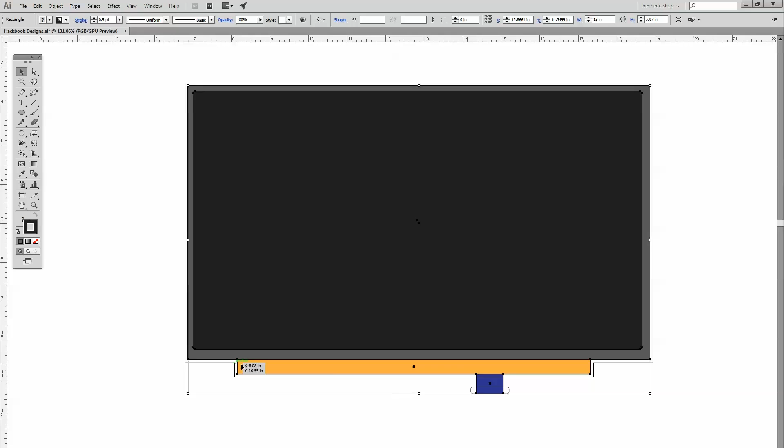Okay, next I'm going to draw in the LCD and get its panel cut. It's pretty simple, so I can do this all at once without creating the rest of the unit. So we have the LCD glass here, and then there's the driver portion that sticks out the bottom. It probably sticks out the bottom so it doesn't have to be on the back, which makes the entire LCD thinner, but it makes it wider.

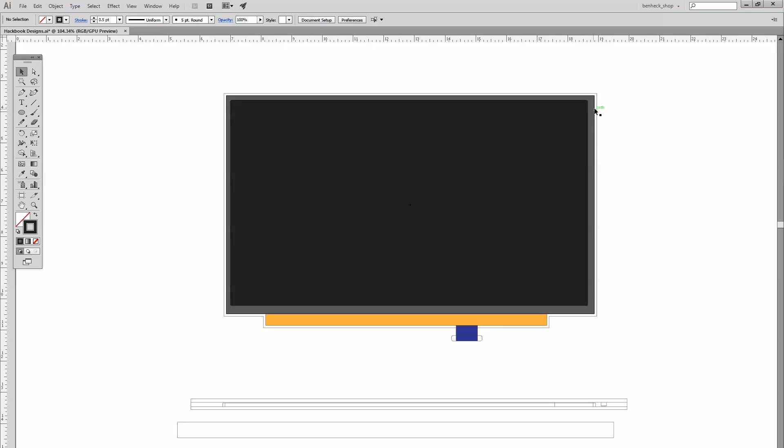We also have to draw in where the data cable is right here, and we want to give it a wide berth so it doesn't bend itself too much, because it's a thin connection, it's fragile, we don't want it to break. So once we know the size of the LCD, we can do a 0.075 offset from it right here, and that is what we'll use the funky foam for.

And so apparently I'm addicted to funky foam. It's really great for things like this, and this is what I actually use it for the most. Funky foam is this adhesive-backed foam, and it's very consistent. It's 0.075 inches thick, always, which means you can count on it.

So if we were to make a concavity in a stiff material for this LCD and have very little tolerance or no tolerance, you could probably cram the LCD in there, but it's a thin piece of glass, and the edges are the most susceptible to damage, so you don't want to do that. But with funky foam, you can say, okay, here's the size of our LCD. We come the distance of the funky foam, then we design the rest of the shape around that.

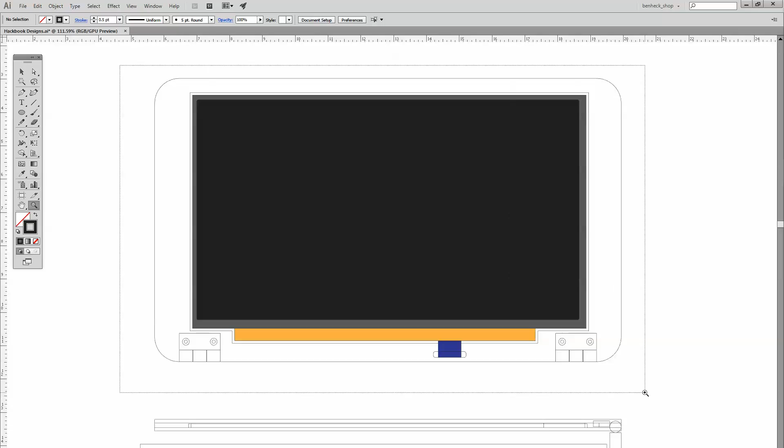And the thing that's great about funky foam is it's foam, but it has some compression to it. So if your measurements aren't quite exactly right, you can still press the LCD between the funky foam safely and also have it fit firmly. So in a way, the funky foam almost acts like a spring, keeping it all centered.

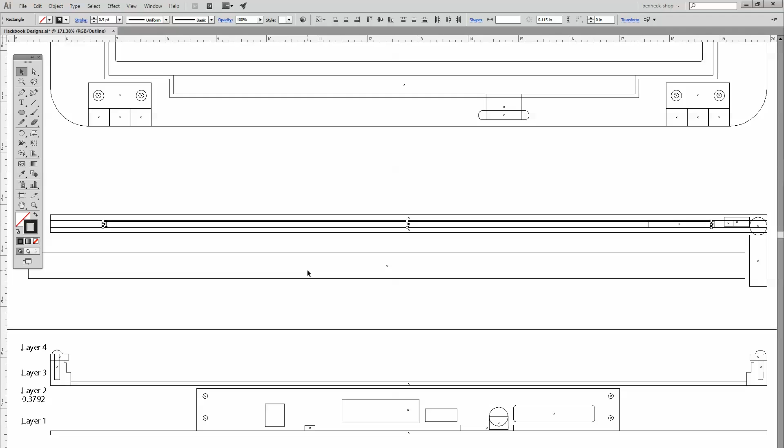So the LCD itself was very thin. Let's see, how thin was it? Less than 1/8 of an inch. So kind of like a car's windshield, the LCD being glass actually has a decent amount of strength, but since we're not putting aluminum around it like a MacBook, we need to actually shore it up a little bit.

So what I'm going to do for this is have a front portion, which will be 6 millimeters thick. We'll cut that out of Sintra and create a concavity in it for the screen. Then we'll cap it off with a piece of 1/8 inch thick black acrylic, which will give it more rigidity. We'll bolt them together, and then we can actually use the black acrylic to our advantage. We can laser cut it and have a backlit logo on the Novena laptop itself.

Because usually with these LCDs, it didn't used to be like this, but now it is. There used to be a metal backing on the back of them, which would help reflect the light, but apparently the light refraction is better now, so some of the light spills out the back, and that's actually how they light up the logos on the back of laptops, because that light's already there.

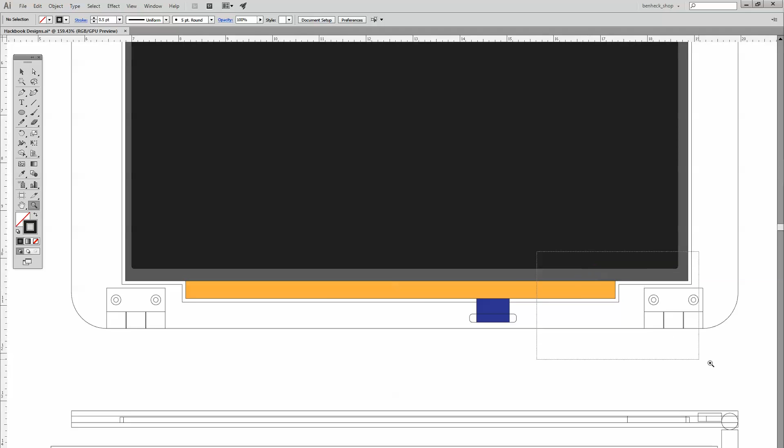So before I can actually route the LCD portion, I need to make the hinges. I'm going to have to do these custom because, as I said, this material is pretty thin. So half of the hinge will connect to the top of the unit, which is not that thick, and then the other half will connect to the base of the Novena.

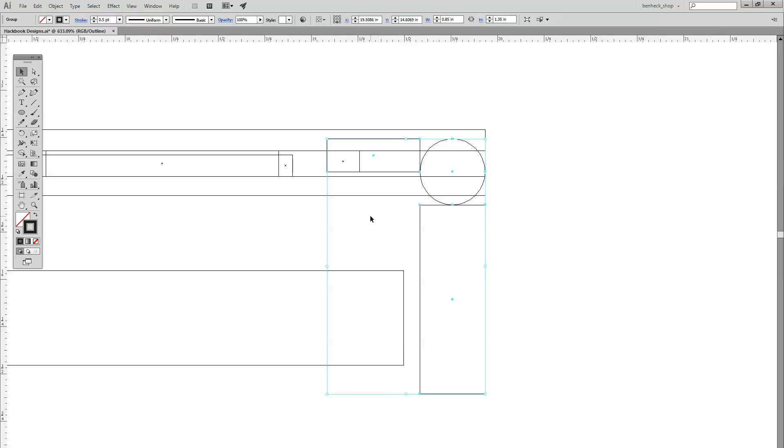So I kind of drew the hinge here. Even though this is the front view, I drew the hinge on the side just so I could see the thicknesses. So this larger rectangle represents what will fit into the base. The circle is the pivot point, and this rectangle at the top is actually what will slot into the LCD side.

So I'm going to go to Fusion 360 here. Here's that same thing drawn as a sketch in Fusion 360. And what I'll do is I'll extrude this out into 2 pieces. So I want to make sure I extrude them separately as separate bodies. And that will actually give us our top and then our bottom.

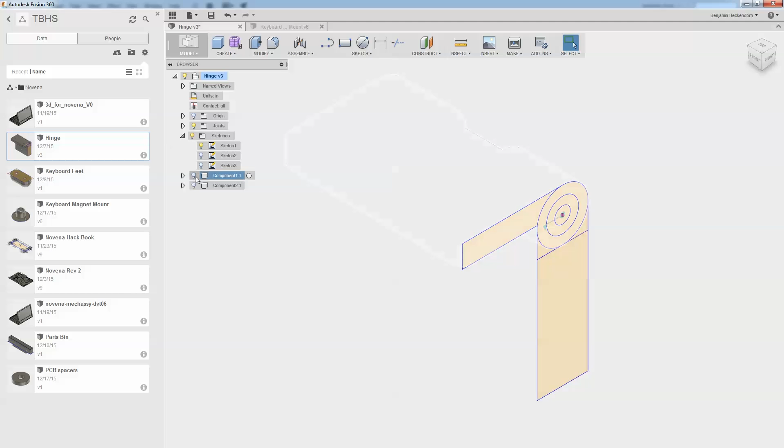And there's screw holes here as well so that it can attach to the Sintra. So the screw pattern here, I have to make sure it matches the 2-dimensional pieces I've drawn down here. At this point, you might ask, why didn't I draw this entire project in Fusion 360? It's because I'm not versed well enough in 360 to actually do this.

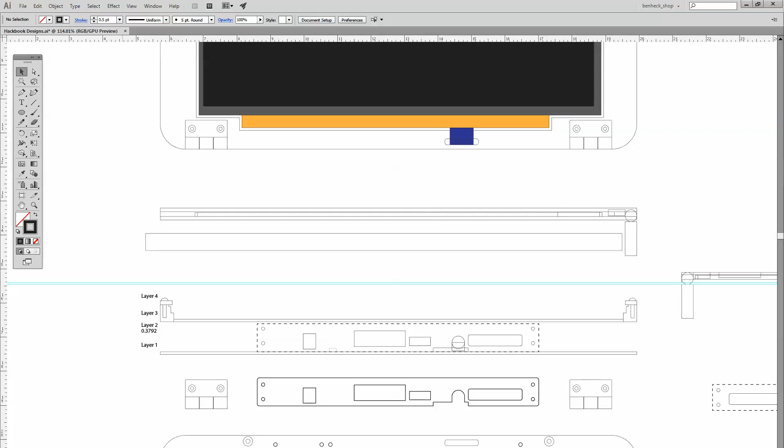So it's faster for me to get this project done using a mixture of Fusion and Adobe Illustrator. Because Adobe Illustrator is really good for routing, which Fusion can also do, but again, when you have a schedule, you do what you know rather than what you want to learn. Okay, so I can 3D print this hinge out, and then we'll attach the hinges to the LCD portion, and then once we assemble the whole unit, we'll bolt the LCD via the hinges to the base.

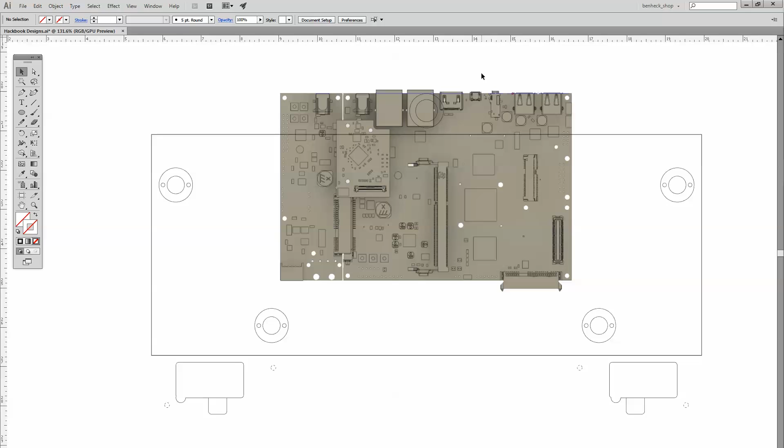Now I'm going to use the size of the keyboard mount and the size of the LCD to determine the overall size of the main unit. Since the Novena board itself isn't that large, we can basically put it wherever it fits best. So we're going to keep it centered on the keyboard.

And then we're going to put the two other largest components, which are the SSD and the battery, on either side of it. There's also going to be a fan that we pulled out of an old server or something in the unit to keep the system on a chip cool. So this fan will actually blow up in this direction.

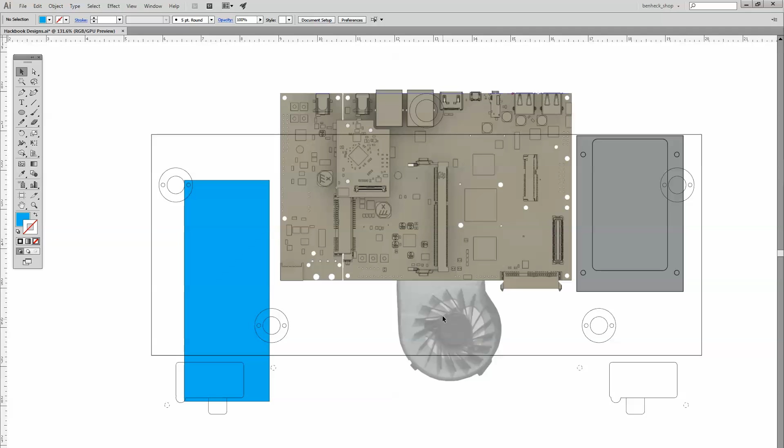The charger board also gets pretty warm, but from the documentation, it's the SoC, system on a chip, that we actually need to keep cool, at least if the unit's enclosed, which it could be if the keyboard's in place. Okay, so on the left here, we have the battery, which I think is actually thicker than the PCB itself. Got it drawn here in the side view.

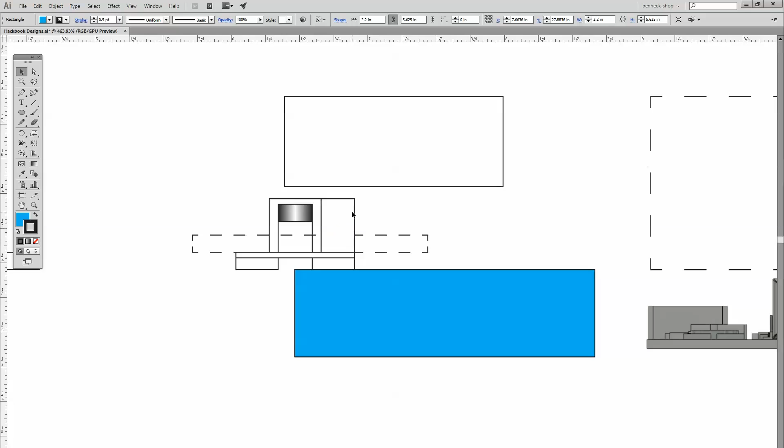And the thing that I had to keep in mind was that the battery couldn't intersect with the keyboard mounts, and these are the pieces that actually hold the magnets that connect to the keyboard. They look like this. Yeah, so I tried to make these as small as I could, but I could only get them so small. See, the magnet fits up in there.

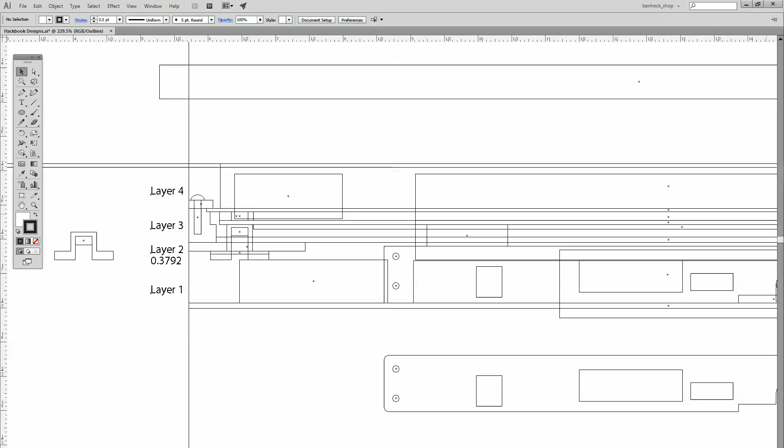So therefore, this doesn't limit the size of the case, but I had to actually make the case a little bit bigger because the magnetic keyboard mount has to fit under something so it can screw into it, and then the keyboard sits on top of that, so everything's related. There's also a base plate. Where is that here? It's on one of these layers, unless it isn't. Oh, there it is. So the battery fits between the aluminum base plate and the plastic keyboard magnet mount.

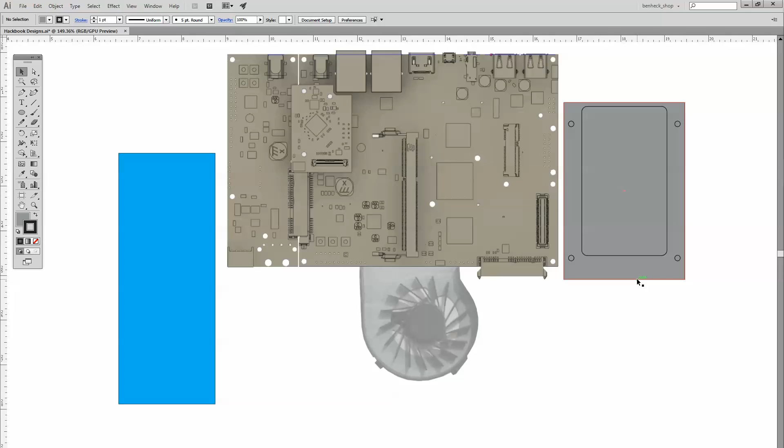Over on the right, we have the SATA drive. It will fit just under the FPGA breakout board, which isn't pictured here. And then if we have this up enough, which it should be here, we should have just enough room to loop over a solid SATA cable without having to cut down the SATA cable, which I don't want to do if I don't have to. Because if you hack up a SATA cable too much, you'll affect the data transfer rates and it basically won't work.

And down here at the bottom, we have the fan, which should fit just above our little component box that we made in a previous episode. The component box has a mount that actually makes it bolt to the base.

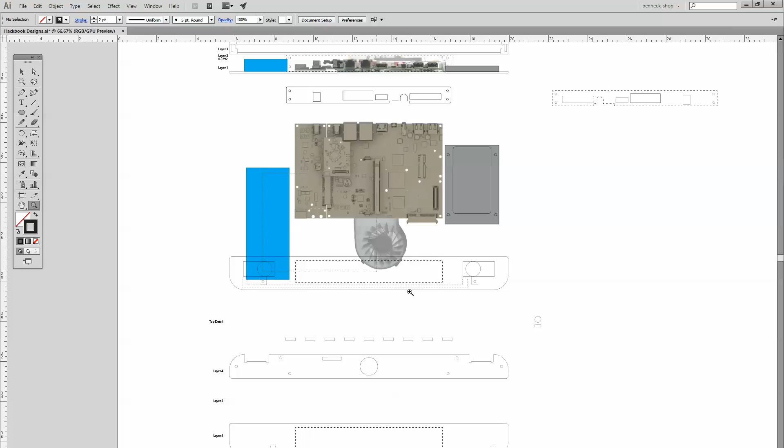That's actually right here, and the fan's just above it. We had to make sure the fan matches the hole that we cut in the base of the unit. That's one of the reasons why I'm going to put rubber feet on the bottom of this, so the base of the unit is raised up enough that airflow can get underneath it. So air is sucked in through this hole and then blown onto the Novena.

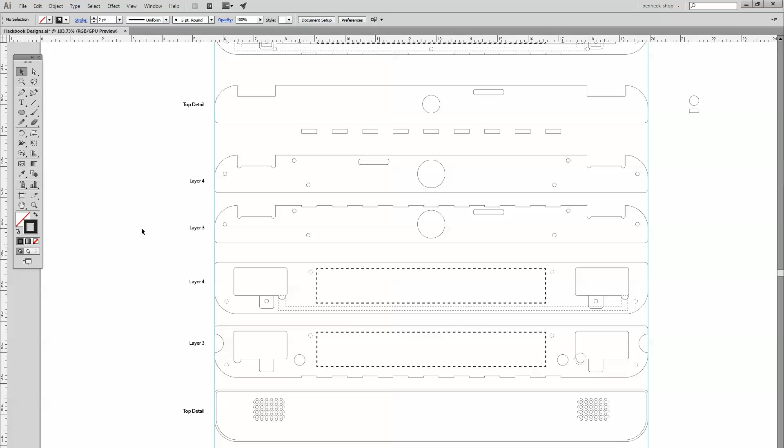The first things I'm going to route out on the CNC machine are what I'm going to call the top risers. This is the portion that holds the power button here above the keyboard, and the portion below the keyboard that will have an opening for our component box as well as contain the speakers. And I'm thinking the speaker riser can actually detach via magnets, so if you want to move it to get at the component box or just do some more hacking, you'll be able to.

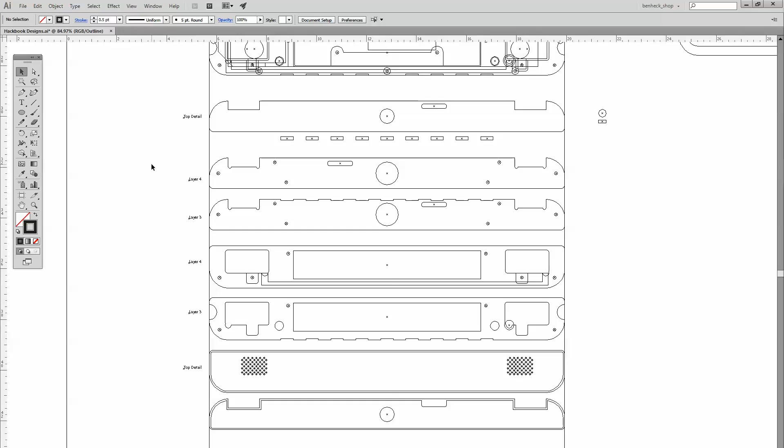I start separating out the pieces on my design as I'm going to route them. So these are layers 4 and 3, so I actually separate them and label them just to make sure I've got everything the way I need it, and then I'll take these two-dimensional images and put them into my program to turn them into toolpaths for the CNC machine.

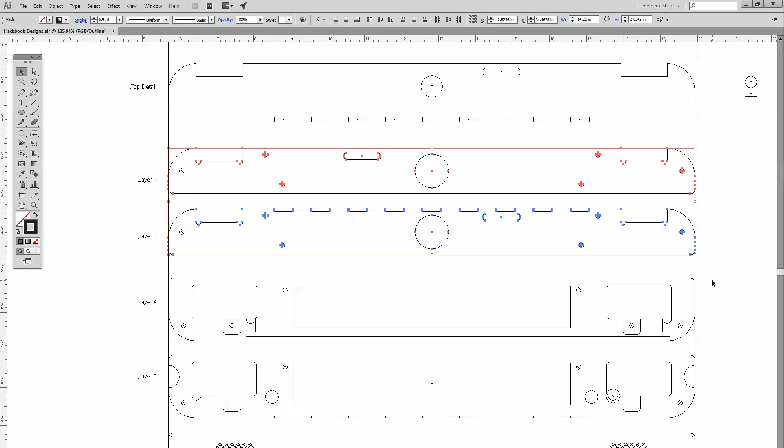I'm going to start by routing the top and bottom risers, which are 2 layers each, as depicted here. Once I have those things built, that'll give me an idea of what the rest of the case is going to look like. So instead of making everything at once, I make it one piece at a time, just in case it's a problem.

So the lower riser is a bit more complex. There's a big concavity here for the component box, and there's countersunk portions for the magnets, so it will magnetize in place. There's also speakers here, so I have to enclose the speakers so there's a gap on top, but then they're enclosed on the bottom.

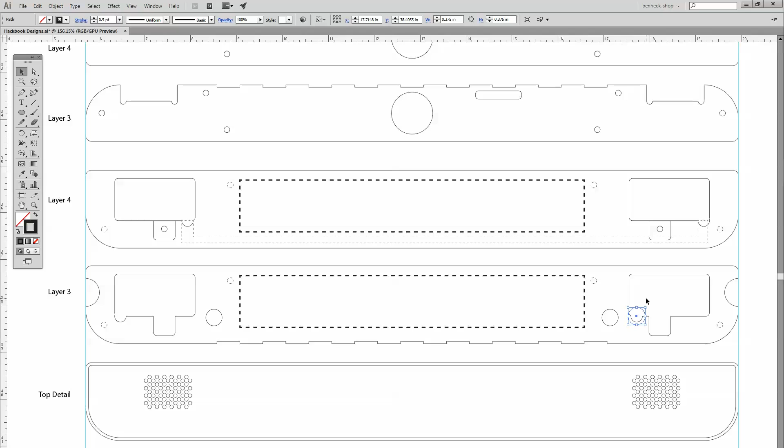Then I have to route a channel for the wires to go from one speaker to the other, then cut a big hole through the bottom so the wires can come out of the bottom of the unit, and then finally when both halves of this are put together, it's basically sealed. And there'll be an acrylic top to make it look cool. So once I wire it up, it's basically sealed forever, since I'm going to once again screw and glue it just to make sure it's stuck.

So the wires that I add, I'll make sure they're way longer than they might possibly need to be, so I can just cut them down in the future instead of having to lengthen them. That's why I always add more wire than less, because it's much easier to cut a wire than it is to extend it. And I guess it's wasteful, but your time is actually worth more than the wires. Sorry, environment, I can't back you up on that one.

Okay, with the risers done, I'm going to start on layer 3, which is the keyboard mount layer. You see these 4 pieces here, and that's actually where the 3D printed keyboard magnet risers attach to.

As I randomly give names to things I did not have names for before. It's like I'm writing a Dr. Seuss novel. The Scarafaragan went into the Babbleduke forest and found a Balazahoot.

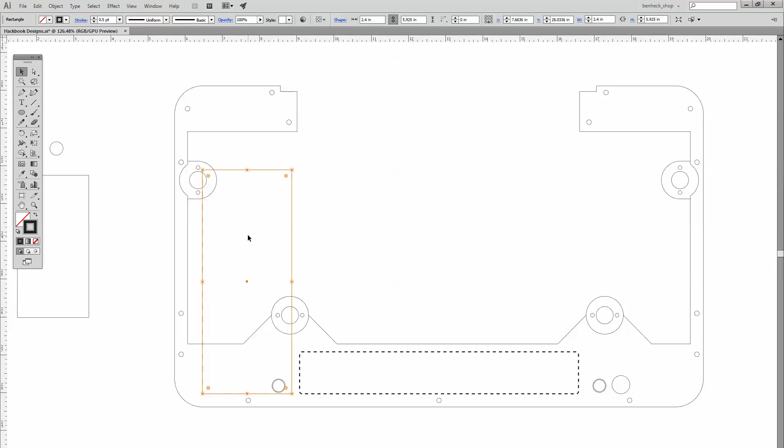This portion here represents the battery, and again, as I mentioned, the battery is pretty thick, so I'm going to route an extra concavity on this layer so the battery has enough room to fit. And these spots here represent the magnets that mate up with the magnets on the speaker portion. And of course, there's a big hole here for our 3D printed component box. All right, I'll get this put together and then make sure it fits the keyboard.